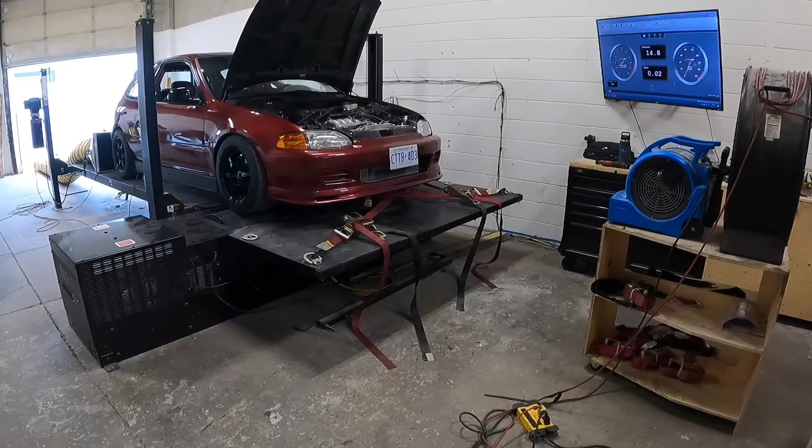I'm not really looking for more power. I just wanted to get this thing all figured out and make sure the air fuel ratios are good to go. So we're not going to be running any crazy numbers. It's probably going to be the same thing. All right guys, ready to go. I'm going to put some heat in this thing and go for the first pull.

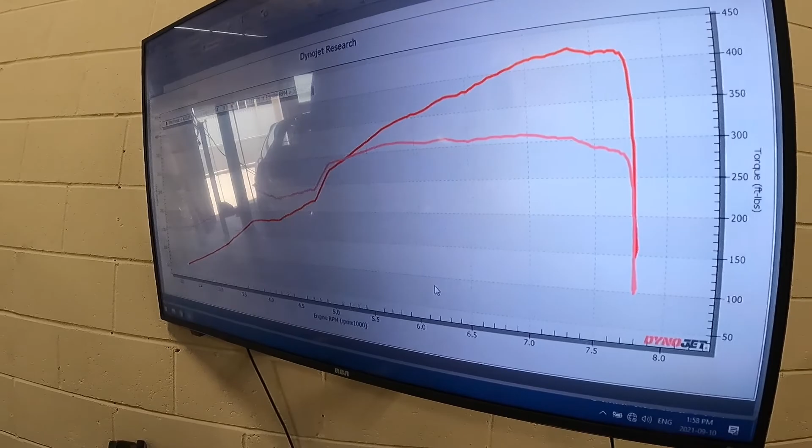423 and 312 torque. That's at about 12 pounds, so it's pretty much the exact same thing. So Nick is saying there's a little bit of duty cycle left on the boost, so he might turn it up a little bit, maybe 13-14 pounds or so, and hopefully we can pass the 450. But I'm still pretty happy with it. Like I said, I just wanted to clean this thing up and just make sure it runs properly with the new air fuel ratio sensor. So we're gonna go for the second pull now.

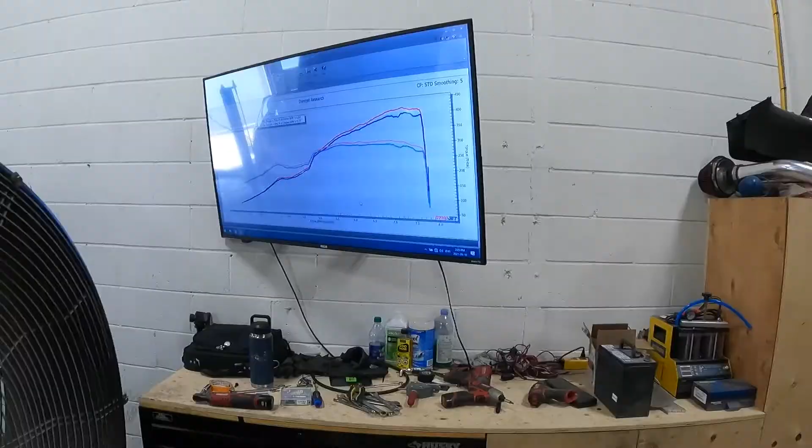This pull we made a little bit less. He added duty cycle to the boost solenoid, but it made less boost for some reason. We're gonna go for the third pull. I don't know, something about these Speed Factory boost solenoids, guys. I'm not liking it. I should have just got a Honda. There's a lot of people talking bad things about this solenoid. Third pull.

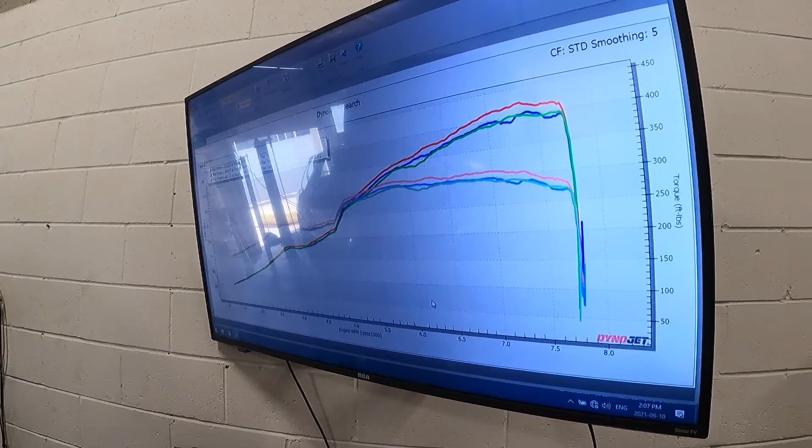So the third pull, it made 1 pound less and about pretty much the same power. That's the green line, as you guys can see. So the solenoid is giving Nick some issues. So we're just gonna go back to about 75% duty cycle, which is about 12 pounds, 12 to 13 pounds. That's pretty much where it liked it, where it was making the 440, 430. So we're gonna keep it that way and just tune it on that.

Like I said, I'm not looking for huge numbers here, so I don't really mind. I just want to clean this thing up once again. So let's go for the fourth pull. All right, guys, this is gonna be the fourth and final pull. Let's see.

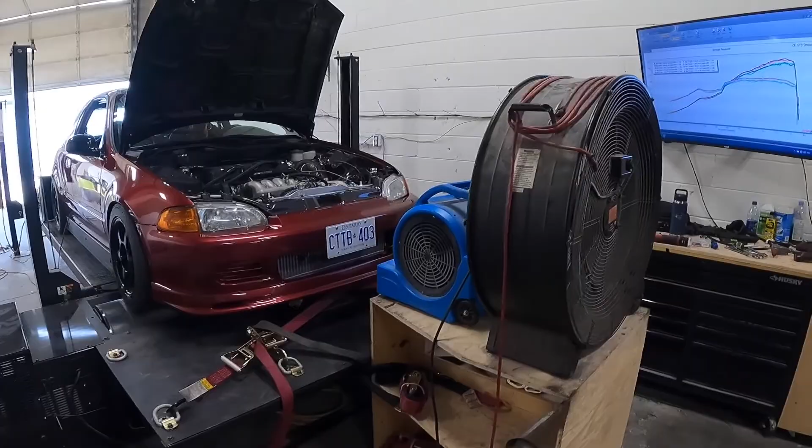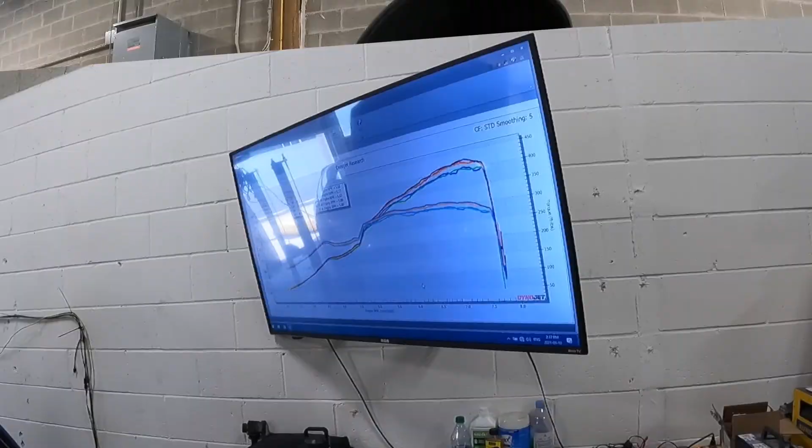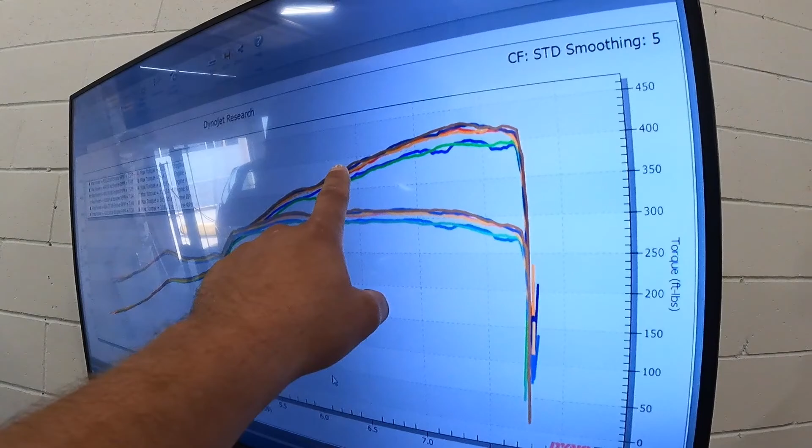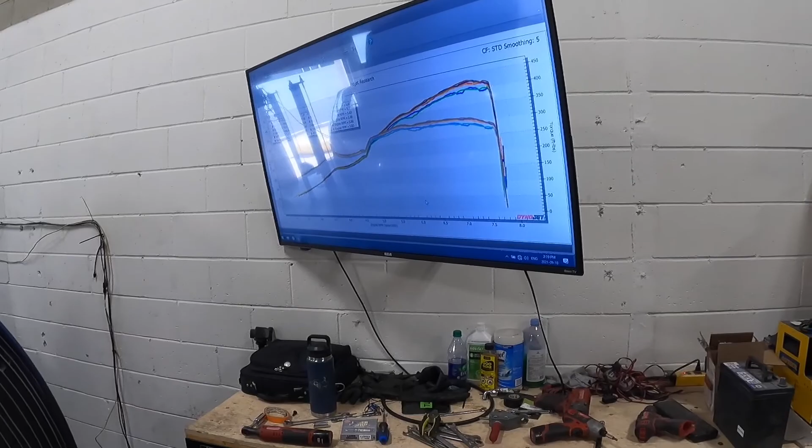Fifth pass, adjusted some timing. Let's see. More power, brown line, tops off, all of them. We got a little bit more power there. About 429 and 318 torque, and I think that's where we're gonna leave it at.

You guys know we can't end off a tune without any two-step, so let's do some two-step. All right, guys, so that'll pretty much do it. Tune is all done. Now Nick is right here and he's gonna be explaining a little bit about what happened.

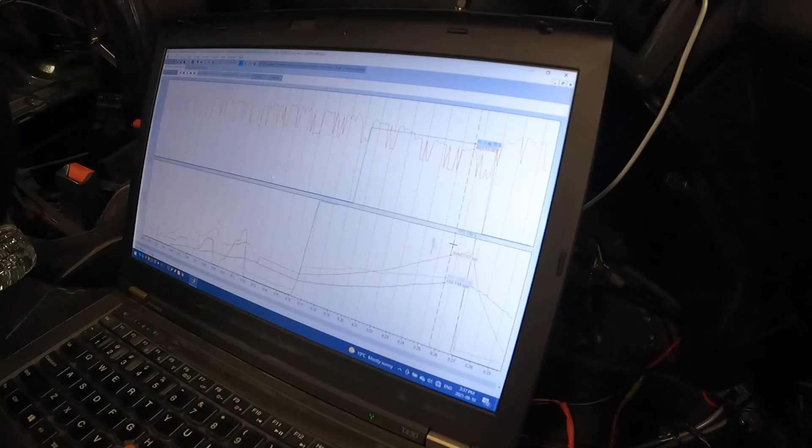And what we're seeing is maxing out the boost controller actually gave us less boost than what we were hoping for. And we actually had to turn it down a bit back to where we were originally, which was about 70% duty cycle, which gave us a peak of 14 PSI. The wastegate has a 7-pound spring in it, which is what you see here, 7 pounds, spooling up around 4,000 RPM. And then the turbo creeps a bit, all the way up to 14 basically, at only 70% duty cycle.

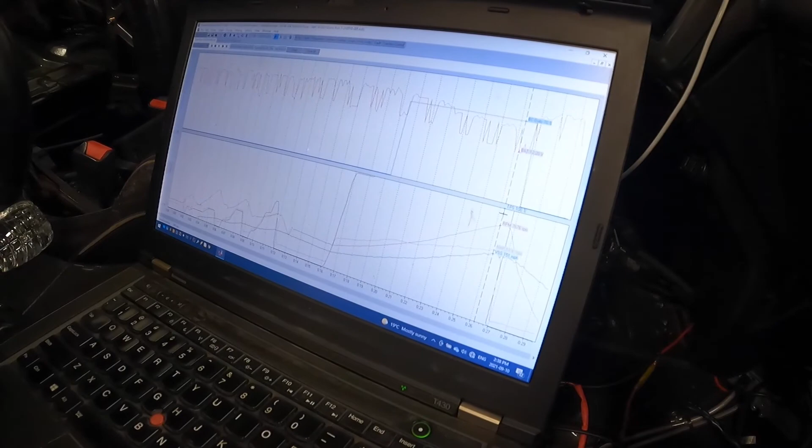But what we were seeing when we tried to turn it up a bit, we were seeing the opposite. Basically 90% duty cycle, we're seeing less than 7 PSI boost, and by redline we were seeing only like less than 12. So that's why we're seeing less and less boost as we were trying to increase the boost. The other issue is the voltage.

For some reason, I see this often in swap cars where the O2 sensor draws too much voltage from the battery power supply and we see inconsistent battery readings. Well, during a pull we should see basically close to 14 volts, but what we're actually seeing is a fluctuation between the high 13s to the low 12s, and that creates inconsistent power delivery.

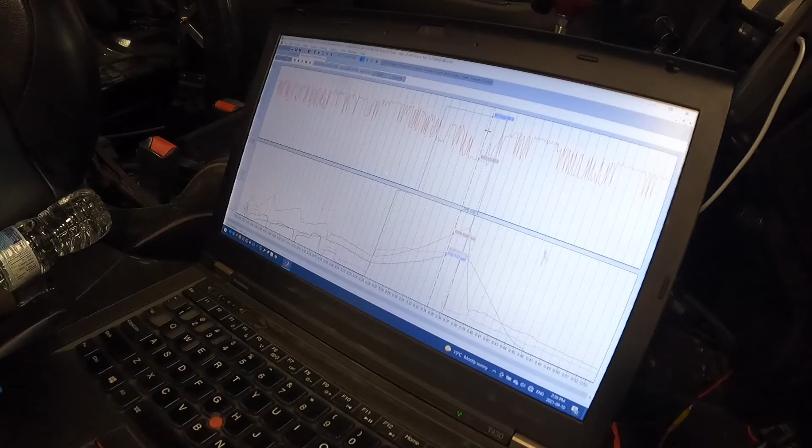It causes all kinds of weird problems with the ECU. The injectors don't work the same. The ECU starts calculating battery offsets all differently, so it makes it very hard for me to do my job. But anyways, I think Laddie's gonna sort this all out over the winter. He'll come back and we'll see how much power we can make with more boost and more consistent voltage.

All right, so there you guys go. I figured that Nick can probably explain it a little bit better to you guys. As you guys saw, around probably the second, third pull, we were making less and less. We did add a little bit more boost duty and it was getting worse. So like he said, the O2 sensor was taking all the power away from the ECU. So at top end, at redline, it wasn't exactly the way it should be.

And like Nick was saying, probably I gotta check the wiring harness. I'm not exactly sure which one is installed, like the conversion harness. I do know that the KTUNED ones do work better than the Hybrid Racing ones. I gotta check which one it is. But that'll do it pretty much for right now. I'm happy the way it turned out. Like I told you guys, I wasn't coming here to run any high numbers. I just wanted to clean up the air fuels so we can hit the track today.